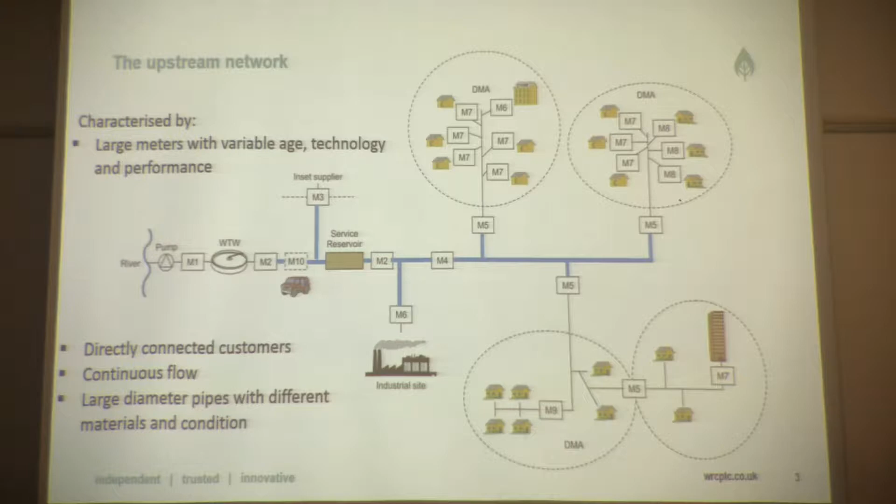They have some directly connected customers. They might be large logged customers, but you might also have a few households just connected to a trunk main because that was the only pipe around, or it could be a legacy issue. They effectively have continuous flow coming through them. So unlike your DMAs where you'd hope that flows drop down, it would still be continuous, but they drop right down during the night. Actually, trunk mains often have flow all the time because they might be doing things like filling service reservoirs, etc. So the flow isn't so connected to our kind of daily patterns of use.

And I've already said, yeah, large diameter pipes with different materials, different conditions. I'd say asset records on some of these big pipes are no better than the asset records on many of the other pipes we have.

So we have to think about them a little bit differently to DMAs when we want to work out what's going on. And one of the reasons why people are slightly sceptical about the approach that I quite love, which is doing balances across them, is because of the meters. So I'm going to talk about that in a little bit more detail. But fundamentally, I believe if you can't measure it, you can't manage it. It's a very old saying that we've used time and time again.

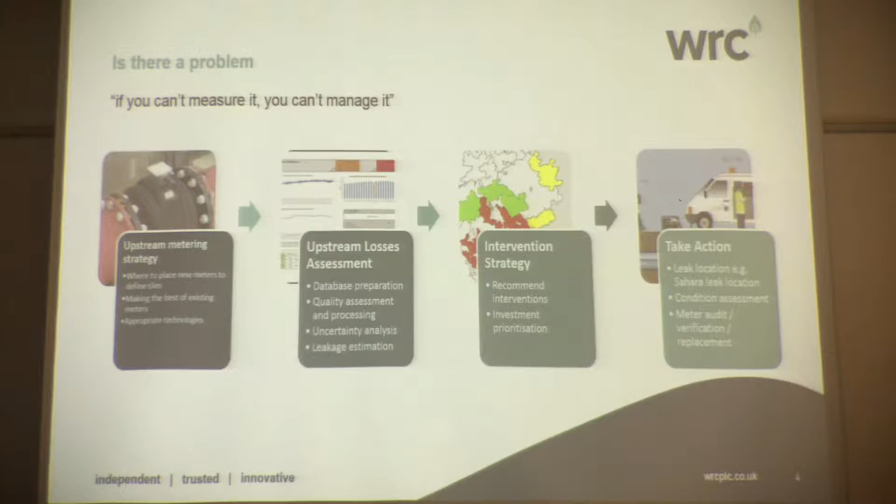And I think it comes back to that water balance question of what is this unaccounted for water? And I personally believe if we can get the water in the right buckets and we know where it's going, then we can start to manage it. And if we don't know if a leak is in a DMA or in the trunk main network, how do we know where to send resource or how to manage out the problem from occurring? So I think we have to focus on quantifying, understanding the upstream leakage to make sure that we're spending the right amount of resource in the DMAs and in them.

So to measure upstream leakage, you're going to need meters, big meters on these big pipes. So you need to have a good strategy to make sure that those meters are sized correctly, are put in the best locations to be able to break the upstream network down. And also to make use of existing meters and understand those meters. Do you actually know which asset is out there? Do you know what type of meter it is, when it was installed?

Have you matched the serial number to the age that you think it is and actually checked that that makes sense? So asset records of large meters.

DI meters, everyone knows about. They have to be verified, that people know where they are, what they are. They might not be very good, but they know what they are. DMA meters sometimes have been fit and forgotten. Interstitial meters, that's a fancy word for ones in the middle of a network that aren't necessarily serving a real purpose, often don't have a clue. You might know there's a meter in the ground, but no one really knows what it was or where it came from. So making sure the asset records are there is quite important as well.

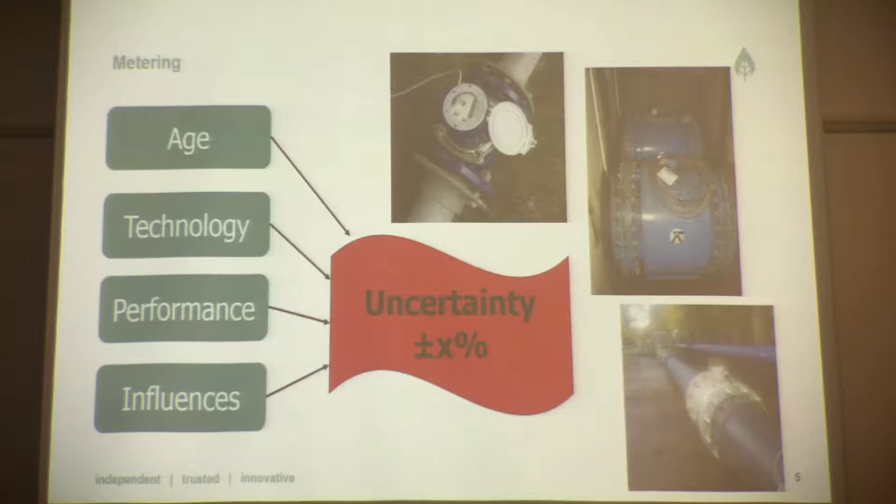So for anyone who's not familiar with metering, effectively you can't trust the number that the meter says on it. You have to make sure that you understand how accurate that number is before you use it.

Meter uncertainty is influenced by lots of different factors, including and not limited to age of meter, the actual technology being used - whether it's electromagnetic, ultrasonic or a turbine meter - performance issues, so has it been stressed through its life or has it just had one continuous flow going through it, and other influences. Is it installed appropriately? Has it got 90-degree bends immediately upstream or downstream of it? Is there lots of sediment in the water going through it causing additional wear? All sorts of other influences.

But we can take that information and meter test records to actually estimate the systematic error from a meter, otherwise known as under and over registration. And then we can use the sample of all those meters that have been tested to actually estimate a confidence band around that error estimate. So you can end up working out how to adjust your flows to get the most accurate idea of the real amount of water passing through the meter, and also understand how sure you are about that number.

The pictures on the slide, I should just say, are of some big meters and also of a large meter test rig, a flow loop that can be used to test them.

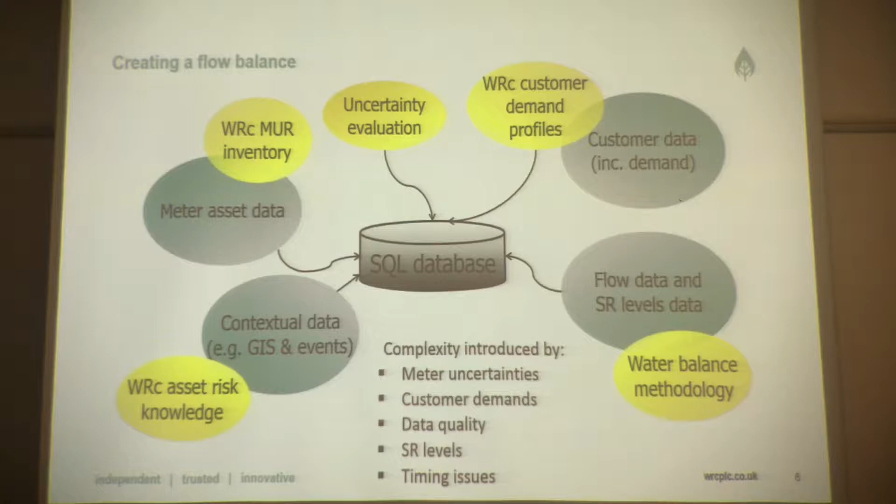So I said at the start, it's not a DMA, so we're not only interested in the night use period, because fundamentally, if the flows are lowest through some of the meters at night, that's when they're likely to be most uncertain. So we can actually get a lot of valuable information from looking at the daytime period when flows are higher.

We can actually look at the diurnal profile that results from the balances, so the average of all the midnight points, all the 15-minute pass points, etc., to inform whether or not we might have got our uncertainty estimates correct, our meter under-registration estimates correct, or whether there might be customers directly connected to the trunk main that the company isn't aware of. A housing estate that actually got connected to the trunk main and they thought was connected to the neighbouring DMA. And this does happen. This is not me making up insights.

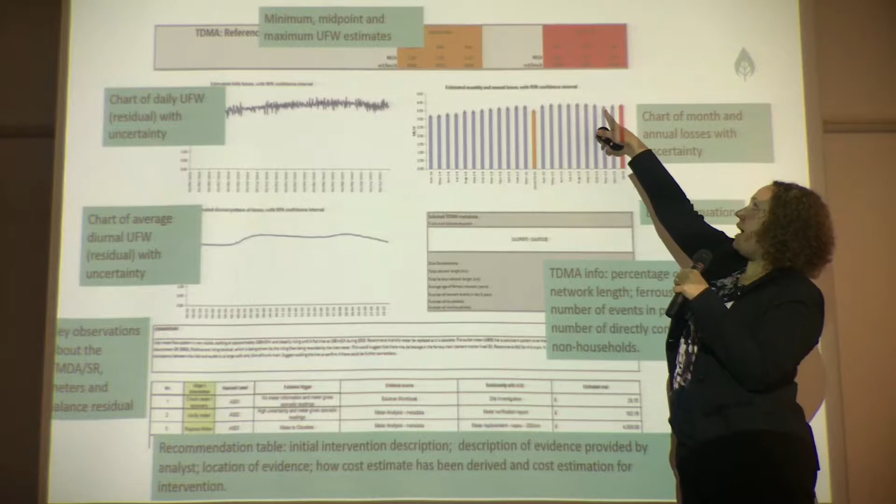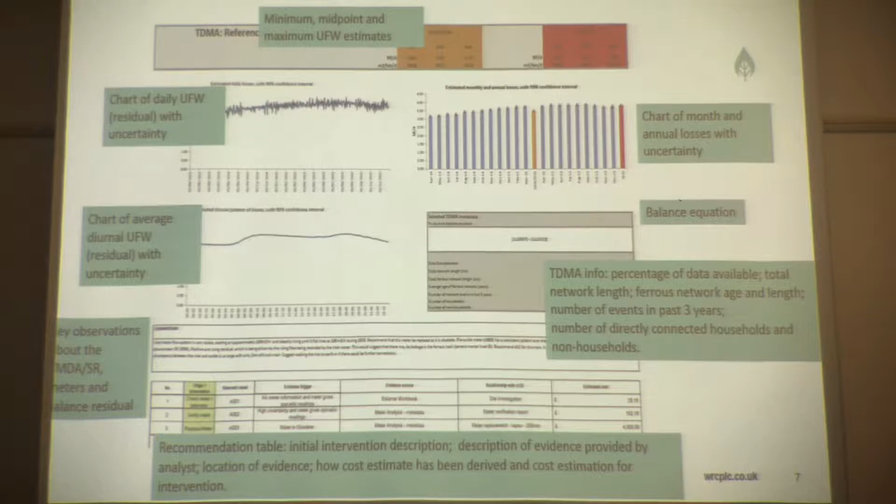So when you do this, it's quite a simple one, but you basically get your losses estimate for the area and you get an uncertainty band around it. If that uncertainty band is sitting above the zero point comfortably, and there's no major metering issue like one of the meters not working, then you've probably got some sort of losses in the area, and that might be a loss going to a customer you don't know about, or it could be a leak. And that's the importance of the uncertainty band.

If your uncertainty band is crossing zero, then actually you might just want to get a better grip on understanding your meters to work out whether or not it's worth spending any further time there. And I think the clever bit is that this is more engineering than data science. There's a lot of data number crunching that goes into pulling everything together, but actually it's engineering insight that's used to say, well, what could actually be happening and causing this diurnal profile, or for this period of time a funny thing to occur, or if we think there is a loss in this area, which pipes in particular might be the first port of call for looking for a problem. Is the cathodic protection working on that major steel pipeline? Who knows? The water company probably doesn't know.

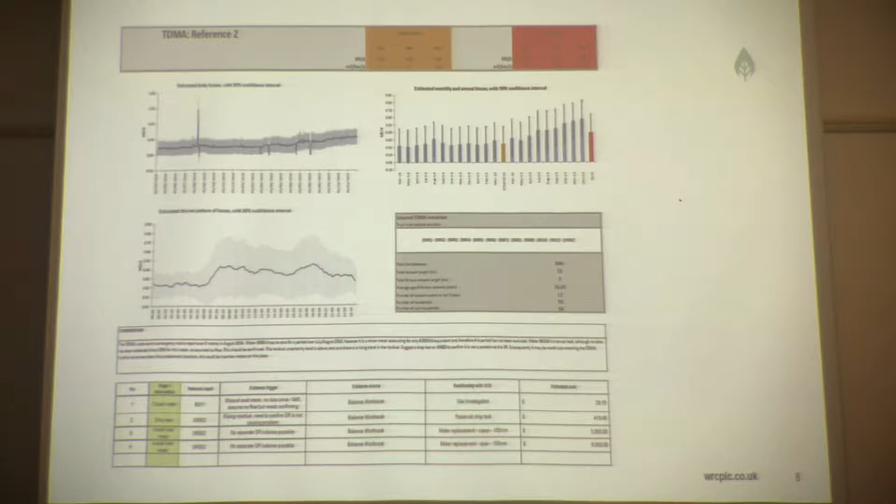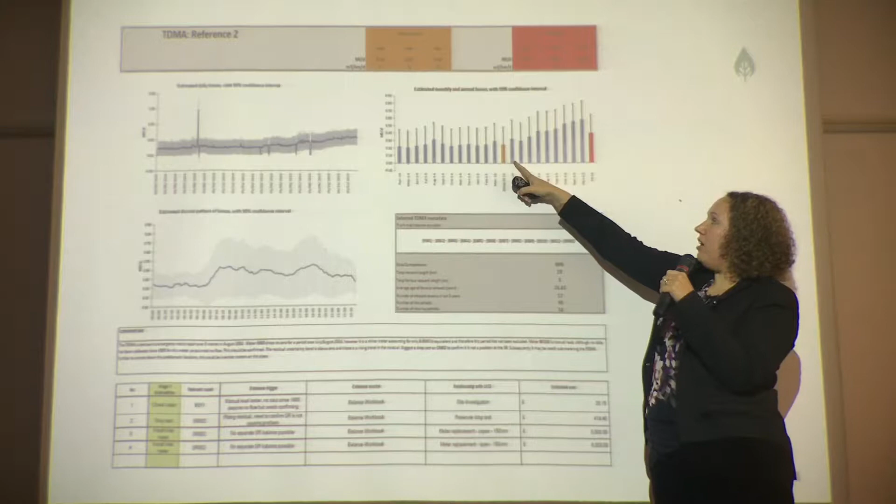Second example here then of another upstream DMA, as I call them, or tiles you might hear them as, or TMAs, or upstream area—lots of different words are used. So this is just an example of a much wider uncertainty band, but you can actually see there's a rising pattern. So even if the real losses were sitting at the bottom of the uncertainty line, it's rising, and so it's a growing problem. So you might want to prioritise this area to try and find out, is that a metering issue, or is it a growing leak in the area?

As I said before, in terms of making those intervention decisions, where that uncertainty bar sits matters. In the top example, which is just some monthly estimated losses, there are two very large meters in this area, 300 millimetres, and actually our recommendation is to verify those, to try and reduce the size of that big uncertainty bar, so that you can work out whether the genuine result is sitting above that zero line, because otherwise you might be chasing a leak that doesn't exist. In the second example, the bar is sitting above zero and it's growing. And in this case, we'd say, well, we think there's a problem or something going on in the network that's worth going and spending some time investigating.

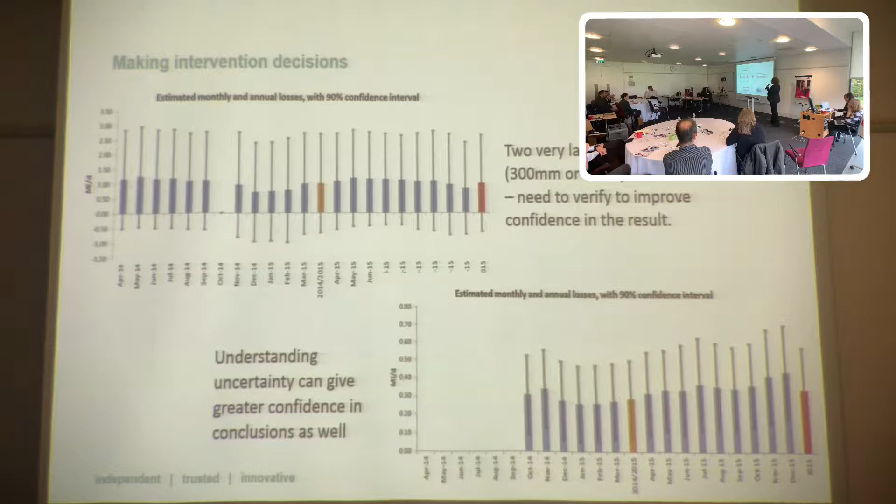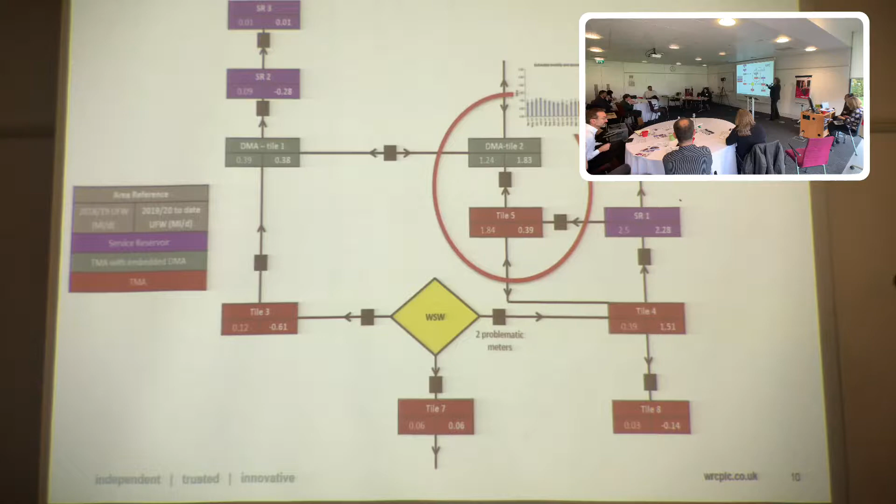I just wanted to highlight this example from another area. It's just an extract of an upstream area summarised, really. We've got 2018-19 losses in the left-hand number box, and 2019-20 to date in the right-hand boxes. Now, this company had previously not done any balance work across their upstream network, but they obviously have DMA-level leakage estimates, etc. And we happened to include doing two DMA tiles in this because they had quite a significant amount of upstream network that couldn't be separated. So one of the DMA tiles looks a bit messier than you'd expect from an upstream one, but there are hundreds of customers.

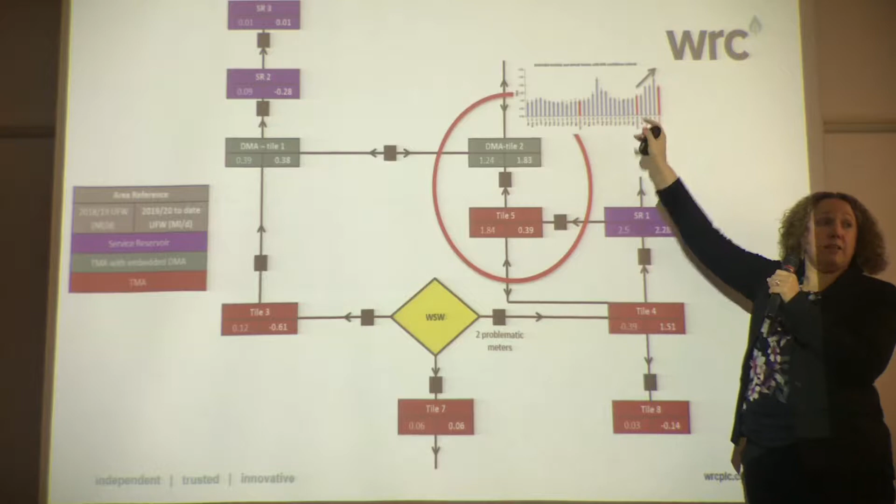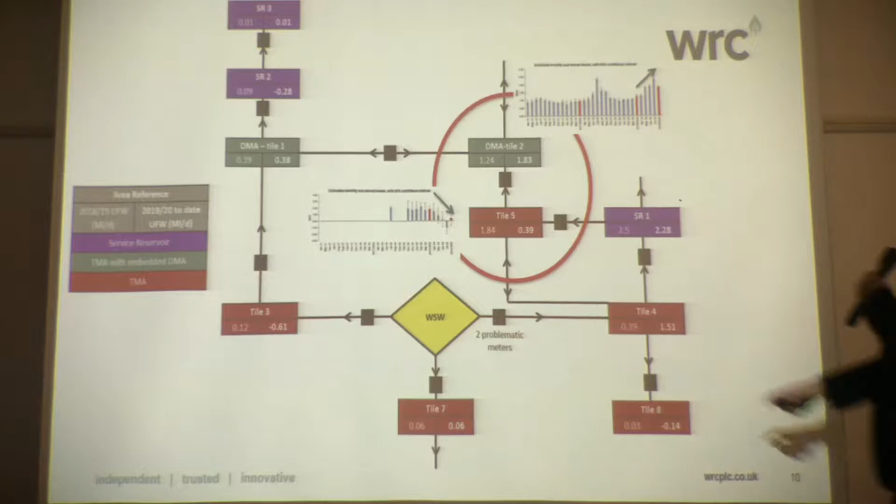We've got 2018's water use—unsurprisingly, a big spike. It was hot, it was dry, everyone had their paddling pools out. It came back down during the winter, and then they saw a similar pattern in 2019, though 2019 was not as warm and beautifully sunny. So this company had been sending out resource to this DMA to look for leakage ever since they spotted this rising pattern, with no knowledge of what was going on in the upstream network. So we came along and produced an upstream balance for it. And unsurprisingly, in 2019, we saw a massive downward trend, so it's dropping down to the negative.

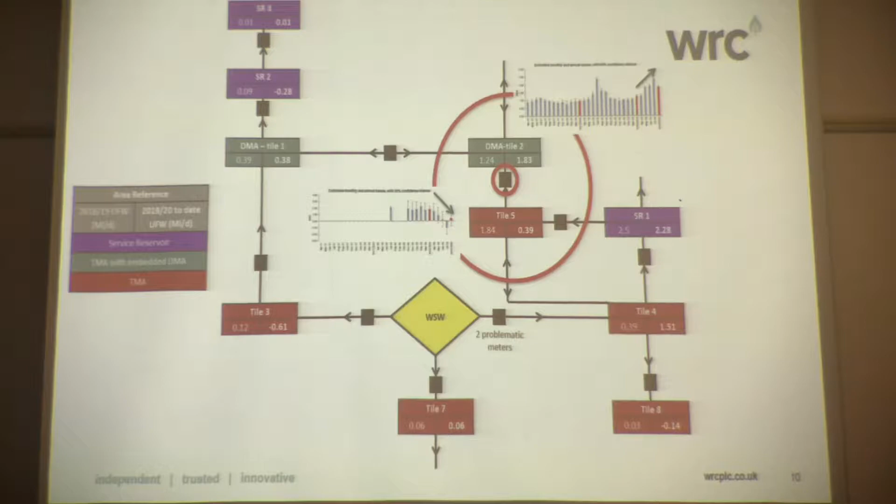That piece of insight led us to say we're suspicious of this meter, we think it's not recording correctly. And sure enough, the water company went out, looked at the meter, and it turned out it was drifting, the performance was changing. I don't know the cause of that, but they've now rectified the situation, bringing down their DMA leakage, causing much cheering amongst them because it was quite a significant volume. Now they can accurately work out what that DMA leakage is. But they'd spent 4 months chasing mythical leaks in a DMA, crews out sweeping, looking for leaks, because they hadn't got that other side of the meter issue.

This is why I think upstream stuff is so important, because what's the point of chasing leaks in DMAs if there's actually problems either at the meters or upstream? You wouldn't know just by looking at the DMA flow.

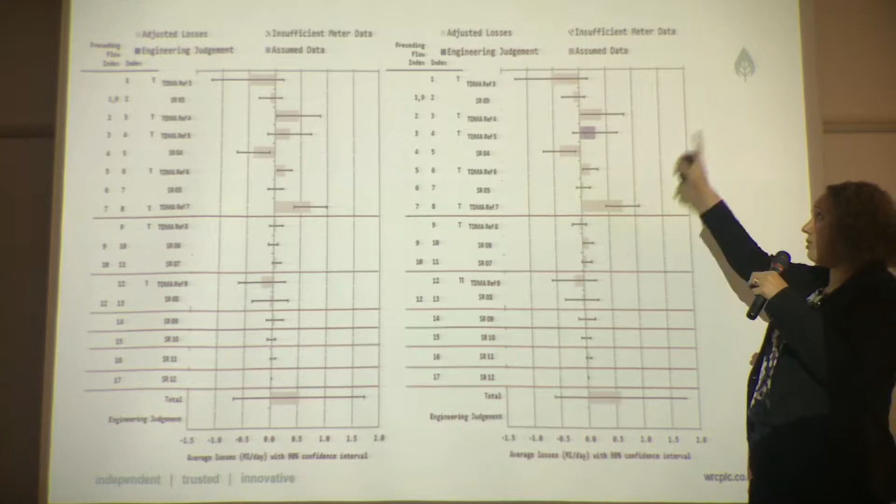My final bit before I hand over to Ant, who talks more about doing practical surveys, is that you can combine all of these smaller areas together. You then remove uncertainty, because if you get more meters that become internal, you can ignore the performance of that particular meter and end up with a larger area zone. You can also often see compensatory effects. For instance, this TDMA has a positive, but this service reservoir has a negative. Probably it's the meter or uncertainty there that's causing the issue, so they cancel each other out. If you put them in the right order, you can see which of them cancel out and which of them actually might genuinely have a leakage problem, to get your total at the end.

This is the segue really to Ant. This is a final example from another water company where we'd done a tile balance and thought there was about 2 megalitres a day of leakage in an area. The company in this case was Welsh Water, who went out and confirmed that the meter flows were correct, the data we were using was correct, and subsequently asked our infrastructure team to go and survey the area to try and find the source of this potential leakage. Inspection by our team identified the location, Welsh Water repaired it, and as you can see, this is a before and after, red and green. They reduced by almost 2 mLD, and importantly, that uncertainty bar is now crossing zero, so the remaining bit could just be a result of the meter accuracy. That's my segue to Ant and his inspection stuff.

Oh yes, sorry, yeah. Sure, we got that one.

Thank you, Carmen. Good morning, everybody. You've heard Carmen talking about the metering side, identifying where potential losses may be. I'm going to talk more about the practical side of things, where we've actually been out doing surveys and what we actually find in practice.

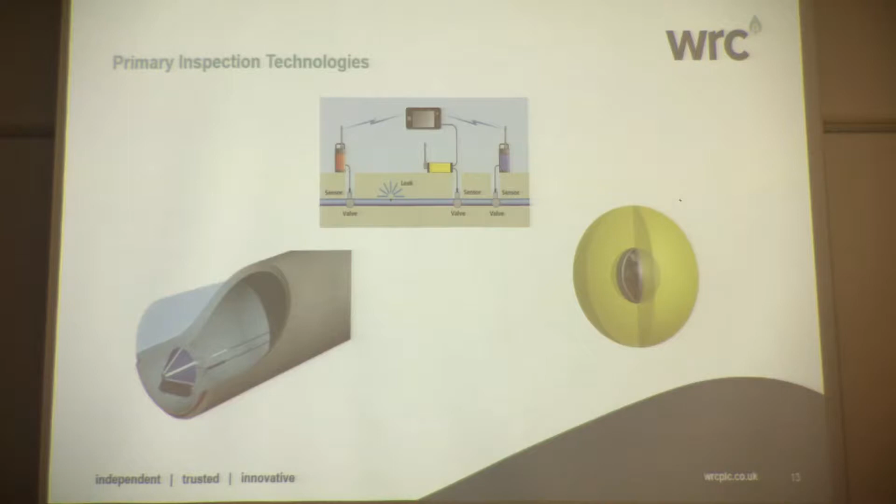There are really 3 technologies I think are probably the most applicable to detecting and locating leaks in trunk mains. The correlator, which we heard about from Joe earlier, was developed - I think actually in the 70s - by WRC, who were working on it. Malc can probably back me up on this, possibly just with knowledge rather than actually being there at the time. But the correlator has traditionally been used on small diameter networks, very good on metallic and smaller pipes, and has in the past struggled on large diameter pipes just because of the physics of the way the sound travels.

Just for those who don't know how they work, basically you have a leak between the sensors attached to the pipe. The sound travels along the pipe and you pick it up at remote locations, and by measuring the time delay in the sound arriving at the two locations, you can calculate the location of the leak between those two points. But it relies on the sound travelling down the pipe, and in larger pipes the sound is attenuated quite quickly as you move away from the leak, so it can be hard to hear smaller leaks. In non-metallic pipes or plastics, the sound is dissipated more quickly as well.

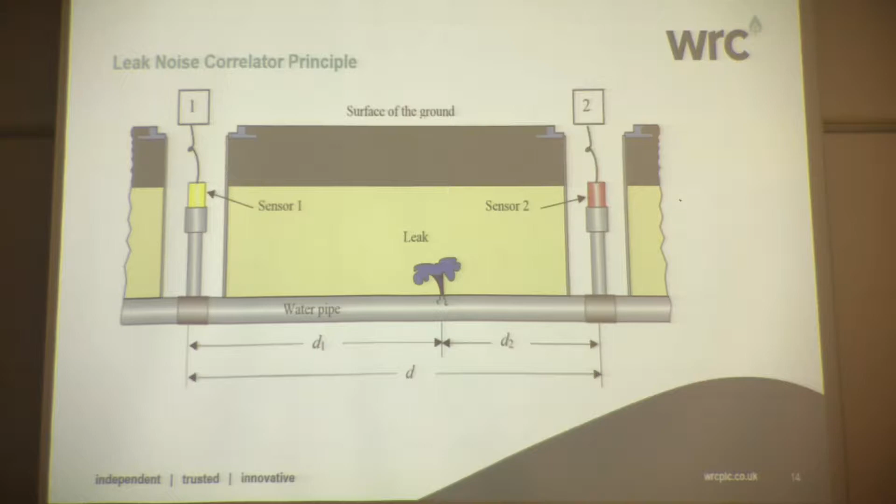Improvements in correlator technology mean it's now becoming more widely used on trunk mains, more successful at finding leaks over longer distances and slightly smaller sizes. So it is a technique, but the thing to be wary of is that if you start looking at very long lengths, you might get a result which says 'I can't find any leaks' - but that might be because it can't hear the leaks, not because there are none there. So it's worth bearing these factors in mind when looking at different techniques you might apply.

The Sahara system was actually developed again by WRC. The correlator's initial research was done at WRC, I think, in the 70s. Sahara we looked at in the early 90s, and started developing it then, as a direct result of awareness of the limitations of correlation in big pipes. We decided that if you could put a sensor in the pipe and have it travel along, you would go past any leaks that were there and be able to detect them.

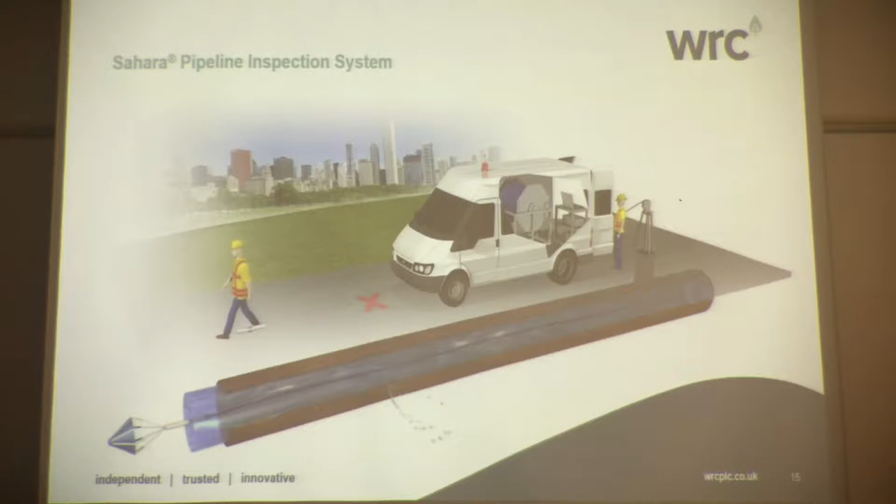We've coupled that with a locating device so that now if you detect the leak with the sensor, the operator at the vehicle is able to stop the cable, position the sensor at the leak, and use the locating device to pinpoint it - if it's sitting directly over the leak, they can mark the ground and identify exactly where that leak is. This is something we've actually been using for over 20 years now, particularly with Thames Water, and I'll come on to some results from that system shortly.

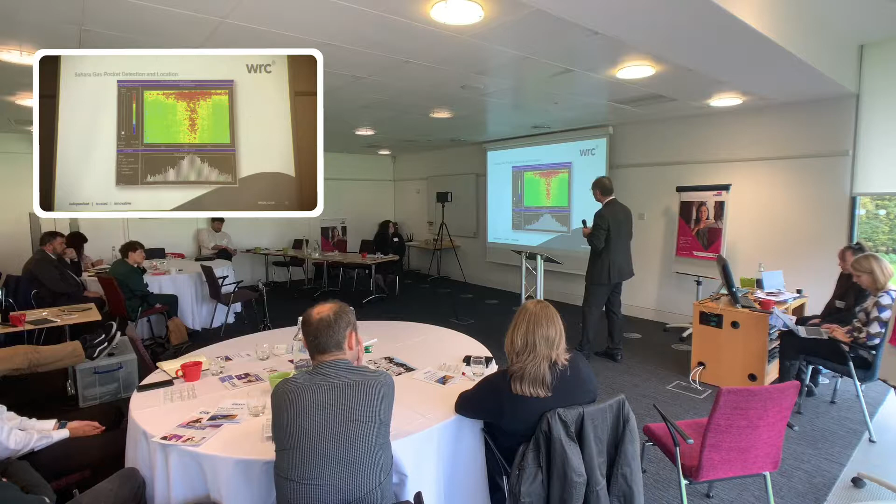The operator gets a number of different displays, but primarily what we're looking at is the sound signature. As you move along the pipe, from left to right, we see a peak in the absolute level, but also a change in the leak noise characteristics - higher frequencies occurring, represented by the bottom edge of the graph, and the low frequencies also building up. That data helps us pinpoint precisely when the sensor is sitting at the leak.

We've also developed the sensors for Sahara, and we have a sensor which can be used on plastic pipe. Although we can use the acoustic method perfectly well, we find that you can also use an electrical conductivity method to find leaks in plastic pipes, and that will also pick up metallic fittings, so it can tell you whether your leak is at an air valve or at a previous repair potentially. So it's additional information that you might get from carrying out that survey.

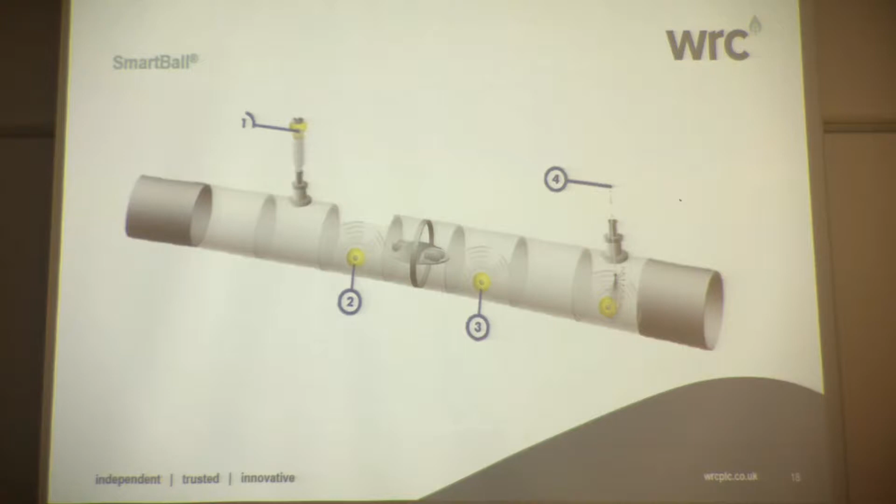I'm going to skip past that SmartBall one, it's an animation of the technique. If anybody's really keen, I can talk to them about that later. What I really wanted to get to, though, was the sort of results.

So, what is the problem with trunk mains leakage? Well, with Sahara, over the last 20 years, we've surveyed 2,875 kilometres of cast iron pipe. That includes resurveys, and our biggest customer, Thames, we actually sweep round their network once a year and are repeating surveys. But in that period, we found 3,400 leaks.

If you just look at what the average distance between leaks is, that's 842 metres. Bearing in mind that we've been through the network, they've repaired them, but they don't repair all of them, they will leave the very small leaks which are probably not economic to repair and monitor them. But what we're seeing is leakage occurring at around every 840 metres, we're finding a leak.

And the average size of those leaks, because we're able to give an indication of size, is around 0.15 MLD, or about between 5 and 6 cubic metres an hour. So I think you'd agree there appears to be a problem there.

If we look at cast iron, so just the first survey at each site, clearly the figures are likely to be worse because these are probably pipes that haven't been looked at. Well, they've probably been in the ground up to 158 or 180 years, some of them. So the first time we've surveyed, the first survey total is about 546 kilometres.

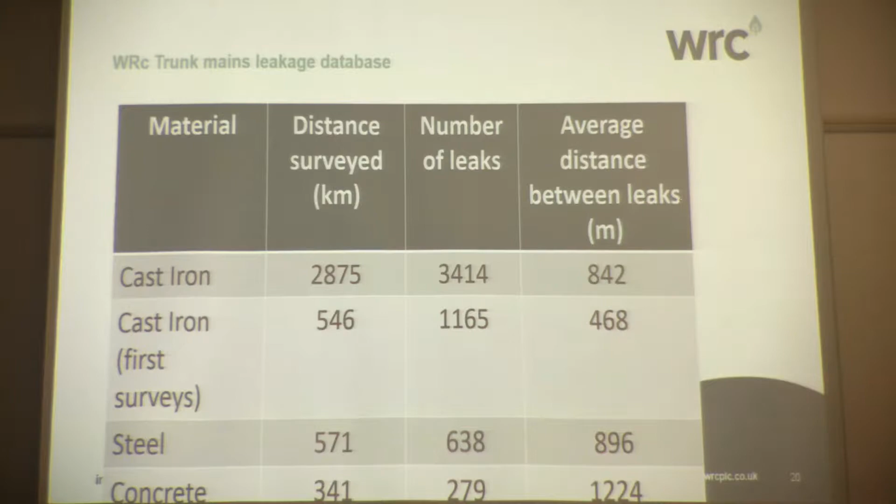No, I'm not sure that's necessary. What you'll notice is there's no ductile iron showing. I think it may have been on the bottom, but clearly ductile iron would show up as well. It actually shows up quite poorly because the ductile iron inspections we've done have been specifically to go and find a leak that's known about on a pressure test of a new pipeline very often, rather than just random leakage detection. So ductile iron would look poor in this data, but actually its performance generally would be better.

The cast iron data is virtually a random sample, but it is heavily biased towards work in London. I freely admit that. But where we have got data from other areas around the world, it's been shown to be similar. The concrete data actually includes a lot of resurveys where there have been repairs done in the meantime, so it is a slightly skewed number.

I think it is quite skewed, actually. I think if I'd gone through and done the first surveys for the concrete, it would look worse than it does. So I wouldn't read too much into the lower numbers. What I'm saying is we've got a lot of cast iron in the network.

But not going too much into that detail - we have 6 plants in Europe, 3 for each technology, so a high capacity. We are generally supplying pipe for all kinds of installations.

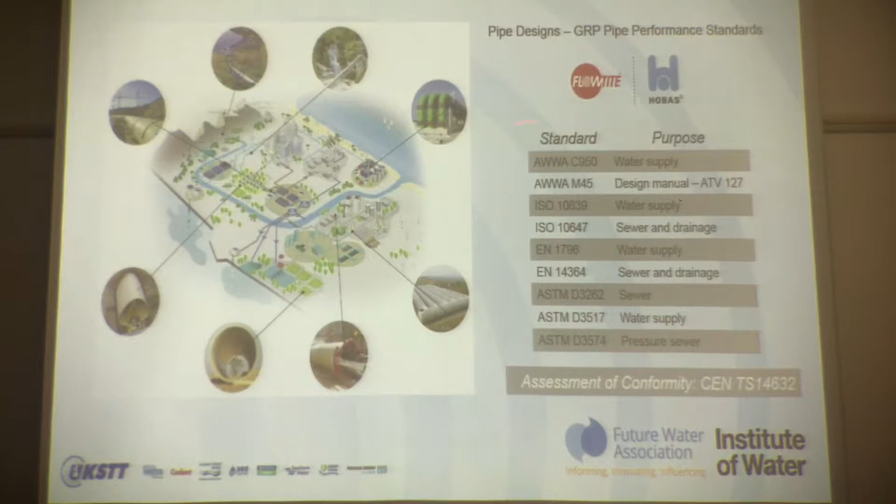We are today going to discuss different kinds of slip lining for pressure lines, sewer lines, stormwater lines, etc. But our main markets are also in water, sewage, industry, hydropower. We're also doing a lot of jacking, and all within the European standards for GRP pipes, following also by all the American and ISO standards.

These days, environment is in focus, and with all respect, GRP is among the best products. A lot of analysis has been done showing that we have a very good material in that respect - this also has to be taken into consideration. One of the big advantages, of course, is also that we have a non-corrosive material with a very long service life.

Just to show you, before we go more into the renovation and relining, this is the product range from 200 millimeter up to 4 meter in diameter. Pressure pipes up to 32 bar. Standard length 6 and 12 meter. Particularly for slip lining, it can be also from 1 meter and whatever length is suitable for the job to be done.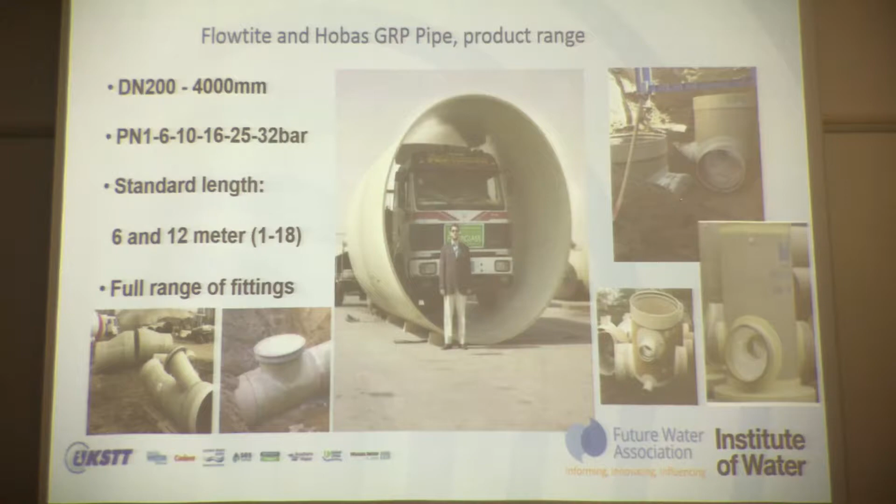And of course, a full range of fittings can be tailor-made, like also manholes, etc., whatever you need on the pipeline.

What we are talking about is a typical composite. It's not a homogeneous material - it's a composite of polyester, glass fiber as the reinforcement, and some filler. Depending on the Flowtite or Hobas production process, we have quite similar ways of building up the pipe, with the structural skin on both sides and the core in the middle.

The standard products will be with standardized pressure classes and stiffness classes. In special occasions, if there is very high abrasion or special chemical requirements, we can also do special liners to have a pipe which can stay for longer than a standard pipe. But normally in municipal work, a standard pipe is very suitable.

Slip lining with GRP pipes. There is a lot of control and evaluation that you need to do before you go ahead with slip lining in general, or with renovation, of course.

The corrosion on the existing pipe, damages, if there are some breakdowns inside the pipeline, if there are curves that you even don't know about before you're inspecting the pipeline inside, the diameter and which diameter can be possible with a new pipe, possible pipe length - both from entrance possibilities and the curves in the line - structural strength needed.

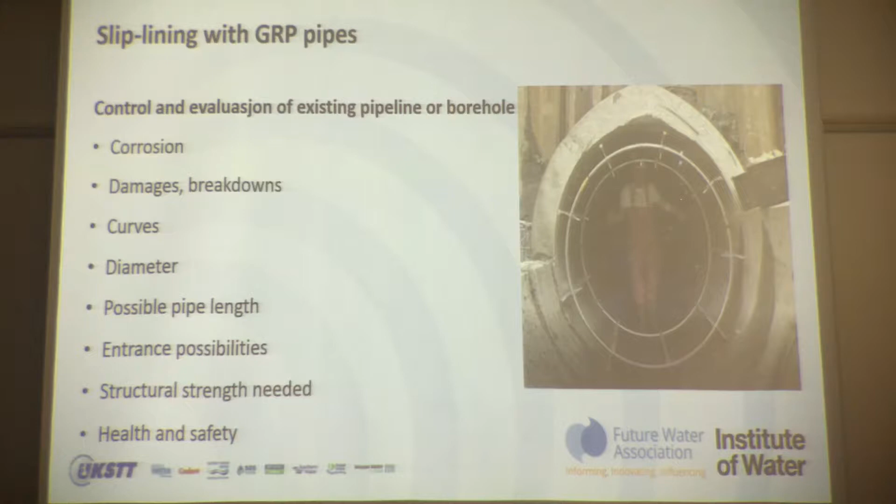Sometimes you have corrosion on the old pipe, but the pipe is still strong enough for years when you do the repair work. But in some cases you also need a full structural solution with the slip lining pipe. And of course, you have to evaluate the health and safety, especially when you're having people working inside the pipeline on the big diameters - that's a critical point in many cases.

Some of the advantages: it's a corrosion-free material, which will last for a long time. We are today quite sure that if our pipes are installed the correct way, they will last for at least 150 years. And when we see all the problems with traditional materials, we see more and more waterworks and utilities requiring 100, but also starting to discuss 150 years.

It's a low-weight material, so it's suitable for transport into existing pipelines, depending on how you do it. And optional length, as I said, we can produce whatever length is wanted. Limited wall thickness, so that we are not reducing the capacity of the existing pipeline too much, but still having high strength.

And we have various joint possibilities. You can have traditional couplings. We can have a lock joint biaxial solution with axial strength. And we can do lamination work so that you get the same material in the joint, so to say, as in the pipe.

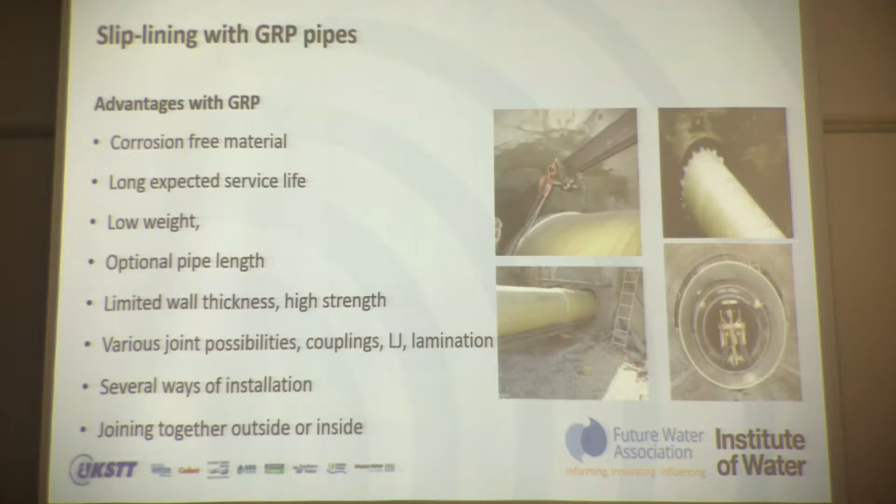Several ways of installation, to transport the pipe inside the pipe or borehole, joining together outside or inside. It's pretty much also depending on the diameter we are working on. On the bigger ones, in many cases, the jointing is inside the existing pipeline. For the smaller diameters, normally we do the jointing outside and push or pull the pipe into the existing one.

You see some pictures here, a borehole in the mountain that was sliplined. Getting back to the project, there are steel bars as a track to push it in. We have special trolleys that have been used to transport the bigger sizes of pipe, with spacers, just pushing them in. And in some cases, even with a crane beam at the top of the old pipe or in the borehole.

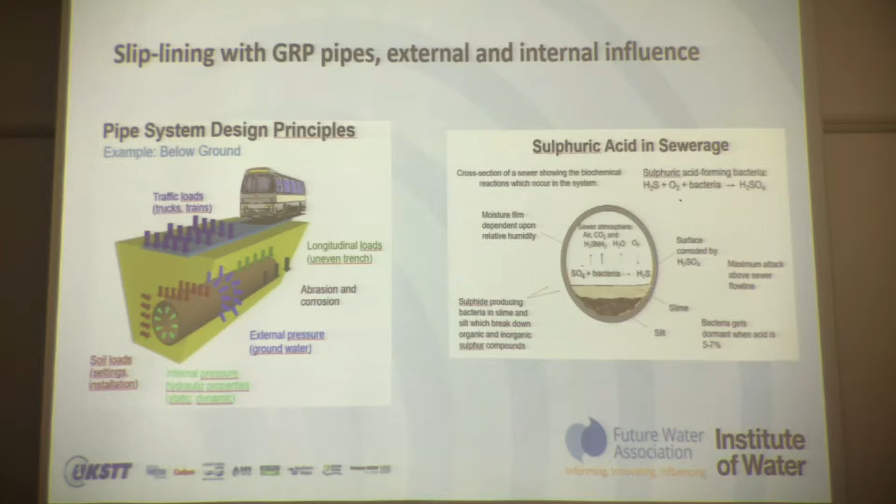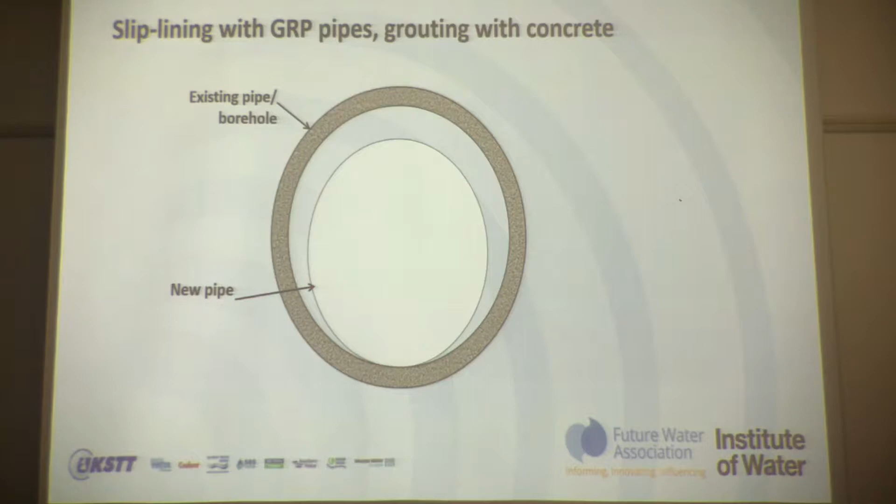When we do the slip lining, one of the advantages with GRP and this kind of work is also with bypass pumping. In some cases, it's difficult to get it completely dry, and with other methods that might be a requirement. With slip lining, it's not that big an issue, and we have even had jobs ongoing where we got heavy rain, and on combined storm sewers we got flooding into the pipeline. Generally, it's more or less just a matter of flushing and cleaning and continuing the work, which would be impossible with cured-in-place and some other alternatives.

When we have the existing pipe or borehole, whatever, and a new pipe inside, there is grouting in between the two pipes. Of course it can be more in the center, depending on how it's installed. But sometimes you have the possibility of drilling into the pipe from outside, filling up the gap in between.

In some cases, we are pulling the injection pipe together with the pipe through the old one. In one project, which I will show later, we used 80 millimeter polyethylene pipes at different distances, and we were just filling them up when doing the grouting. In other cases, we supply the pipe with nozzles so that you can also do the grouting from the inside.

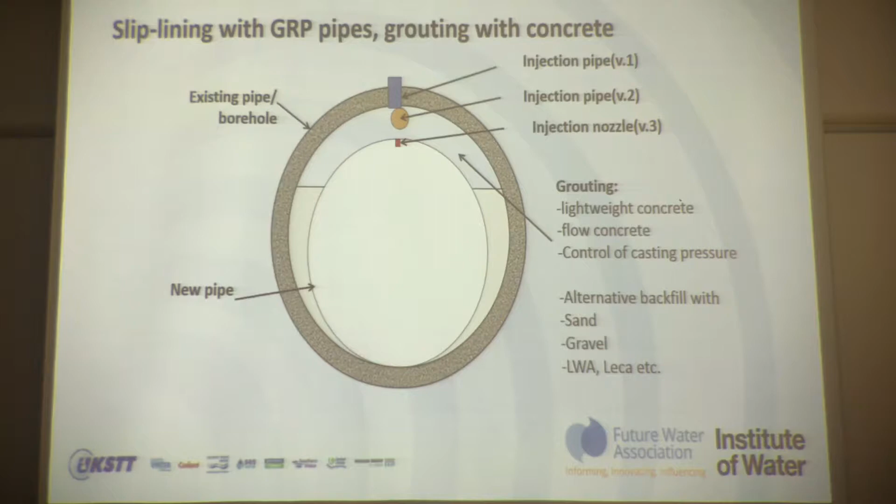Alternatively, you can also fill up the new pipe with water. If you have a steep slope, this also compensates the inside-outside pressure difference. Alternatively, backfill has also been used with sand, gravel, and lightweight aggregate like LECA, which are blown into the gap between the two pipes.

The problem is getting a 100% filled gap — if you have settlement or a crack on the old pipeline, you can get punctual loads on the new pipe, and you can also get settlement in the ground. But of course, the advantage with gravel, sand, and LWA is the possibility of taking the pipe out again, which is much more difficult when you have grouted it in concrete.

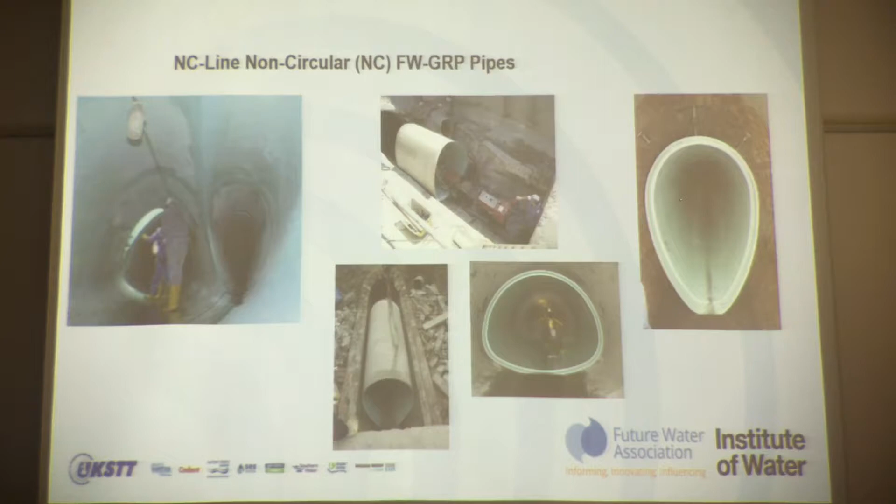In addition to round pipes, we also have a big production of non-circular pipes, which are also used in many cases for slip lining. Let me show you a few samples.

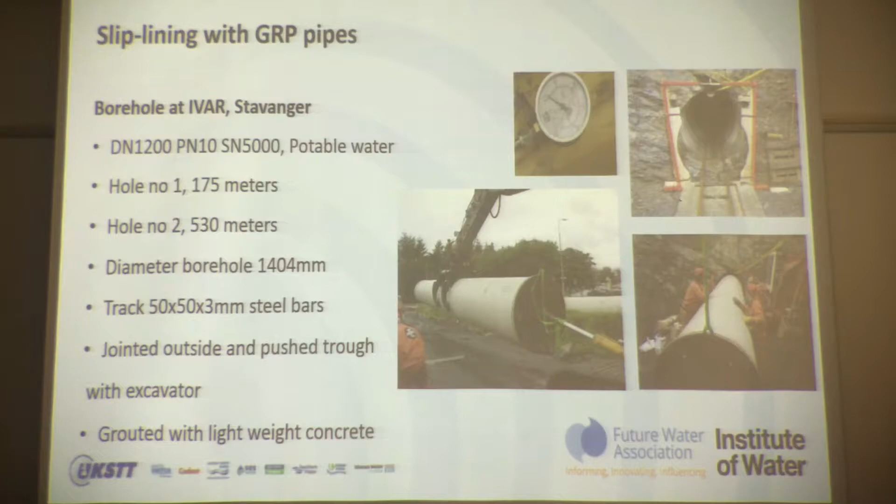In Stavanger on the west coast of Norway, this is a potable water line installed in a borehole in rock, which behaves similarly to an old pipe in many cases. It's a 1200 millimeter PN10 potable water line, with two boreholes, one 175 meters and one 530 meters. They drilled a hole of 1404 millimeters.

Then they built a track through the borehole using 50x50x3 millimeter steel bars. The pipe was jointed outside on the track and pushed in by an excavator.

There was a buffer, just a cylinder, to take care of things if something happened, and they monitored the pressure on this cylinder. If friction increased or the process stopped, they had 1 meter to collapse the cylinder, because there was a safety valve to prevent the excavator from putting too much force on the system.

We tested pushing two pipes against each other inside the coupling before this job, with a 1 degree angular deviation inside the coupling. The measurement stopped due to technical issues with the equipment, but we had reached 85 tons without any damage to the spigot of the pipes.

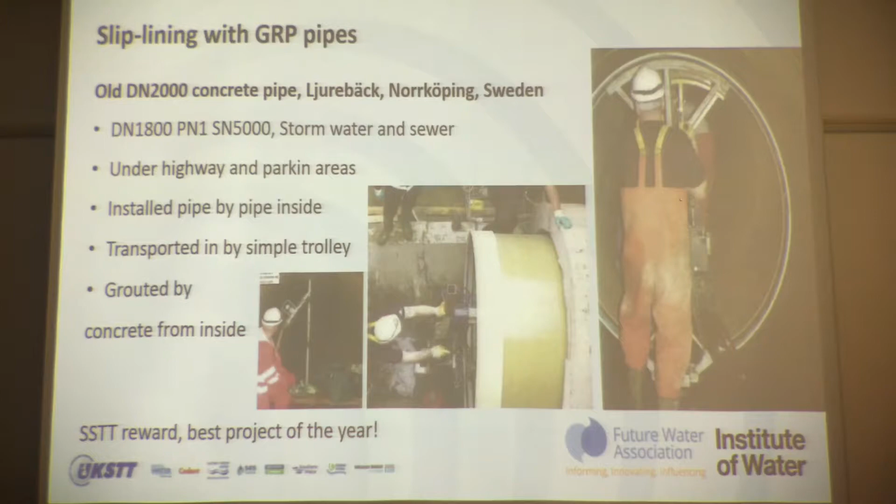The installation was under a highway and a parking area, totaling about 444 meters. The access point was at an elbow in the middle, so they did the slip lining in two directions, and then put the elbow in place last, before the grouting.

Here you also see they had a simple trolley at both ends of the pipe, manually pushing the pipe through and connecting them inside the pipeline. The grouting was done through nozzles we supplied on the pipe, with concrete pumped in from inside the pipeline.

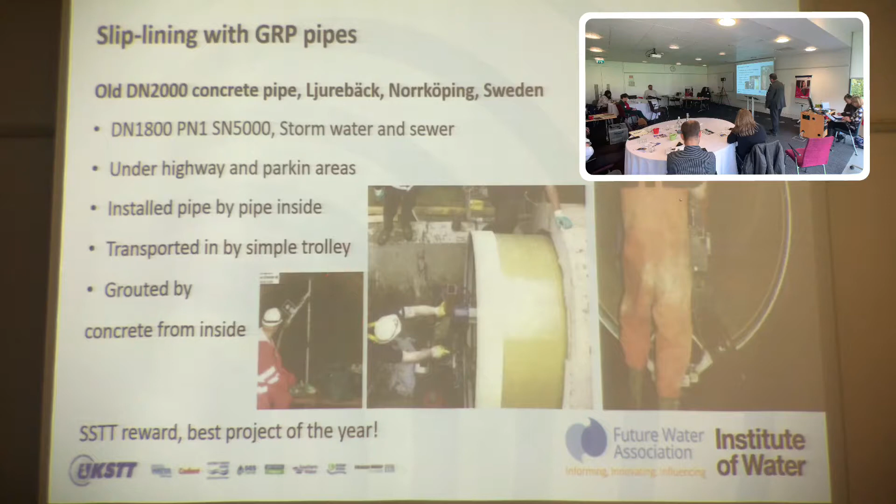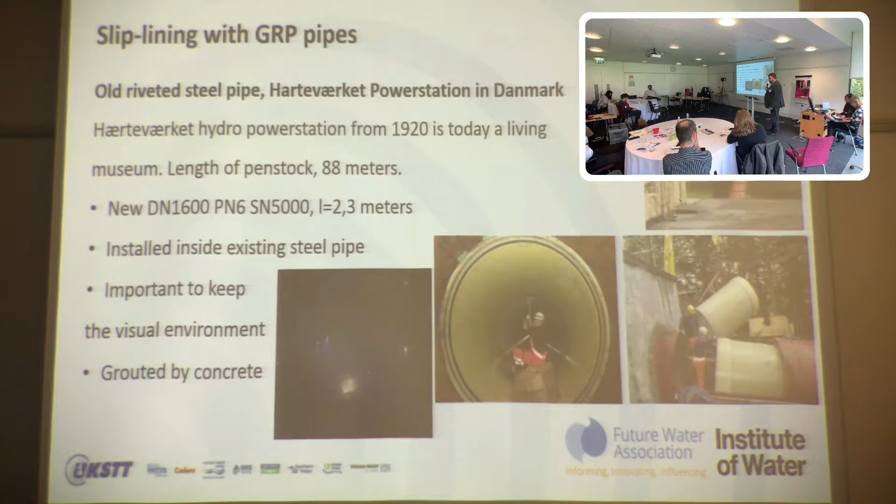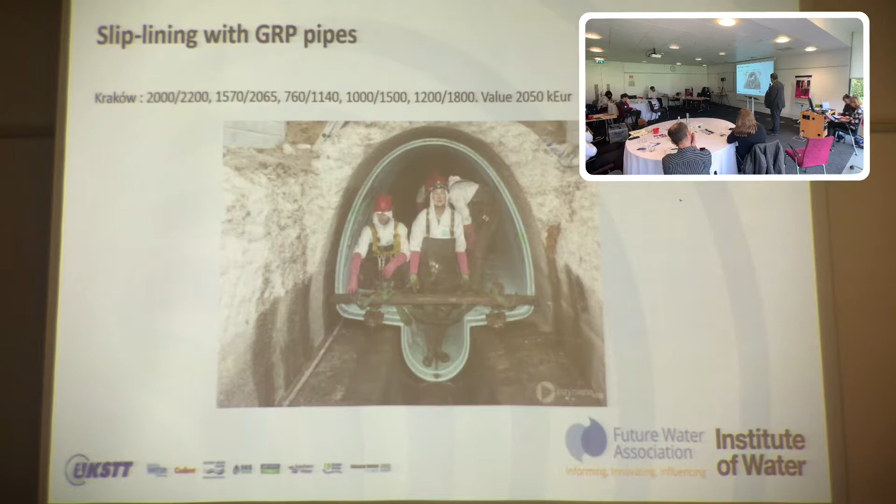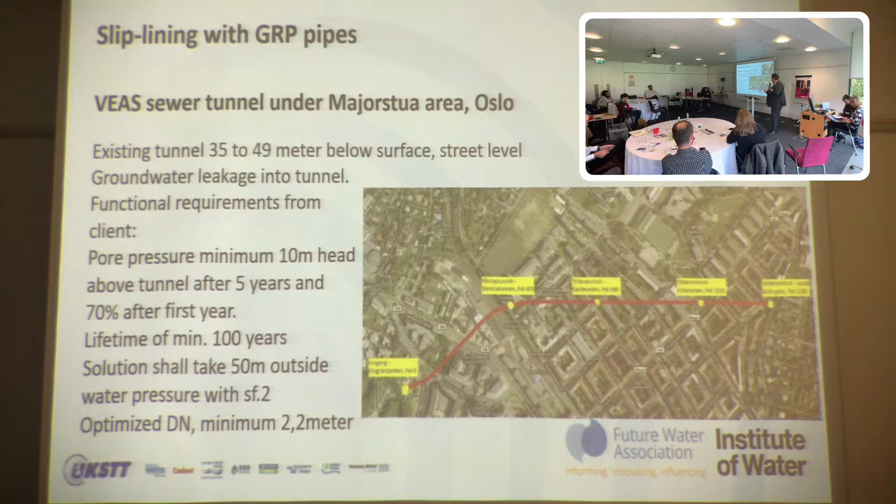...together with Skanska, sitting down and doing a lot of preparation during the tender phase, preparing everything - the logistics and how to do it. It was one access point, and it should be a length of 1150 meters into the old tunnel.

After having a 'tolk', as we say in Norwegian, a dummy to go through and see which length of pipe was possible in the curves and which diameter could pass, they ended up with 2.3 meter diameter and lengths of 4 and 2 meters. The reason for the two lengths is that in some of the curves we took advantage of the angular deflection in the coupling and made the curves without having to produce any bends inside the old tunnel.

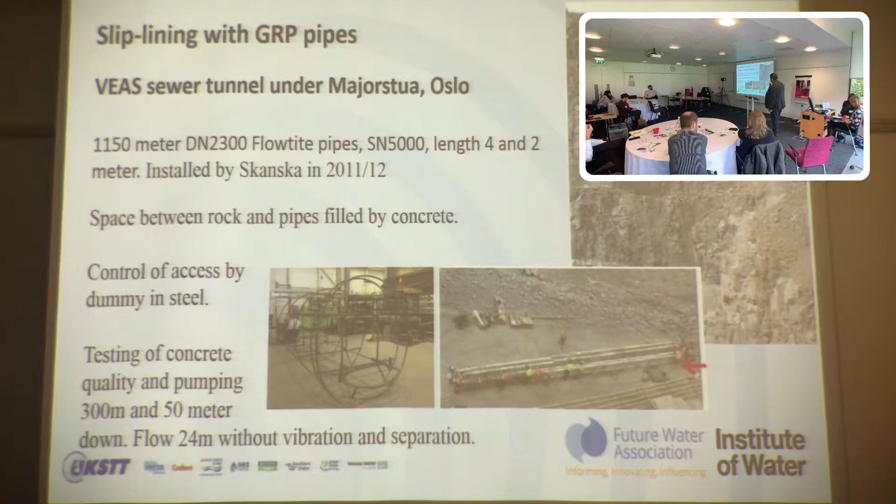Of course, when you're pumping concrete, it's easy to have separation of the concrete. So Skanska and the concrete supplier did a lot of actual testing - they had a full test area of dropping the concrete 50 meters down under the surface and pumping it like 300 meters before it should be grouting between the new pipe and the tunnel. So they found a good recipe for the concrete that works fine, and then they could pump it - it should also flow 24 meters in the grouting area, because the sections for each grouting were 24 meters of installation.

Here we see a number of pictures - a very special trolley with its own engine and hydraulics. It was driving into the pipe, lifting the pipe, and driving into the tunnel. When you are putting 4 meter and 2 meter pipes at a time, and starting almost 1200 meters in, the logistics are of course very critical for the installation and the schedule.

And then you see in some areas, because it was also a very strong requirement that there should not be any water going in between the rock and the pipe, there was injection both between the pipe and the concrete and the rock with epoxy after the grouting was done.

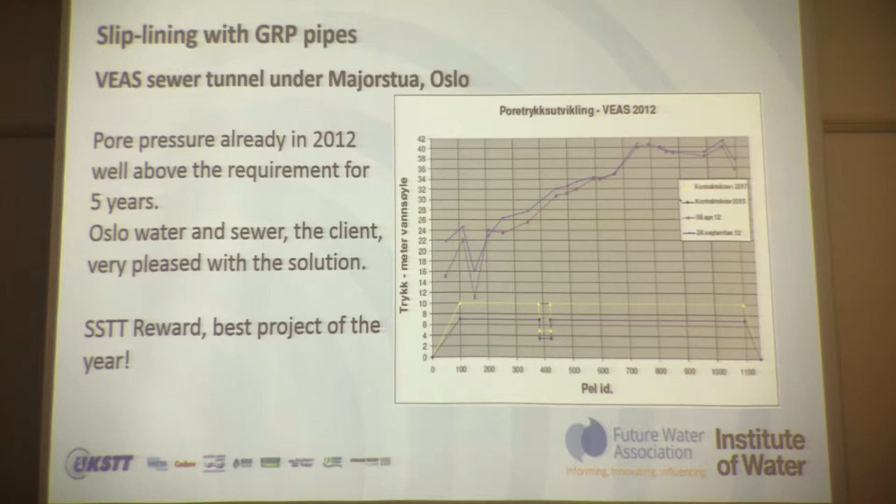So that's it. We also like to thank some of our UK clients for a project that we have been through. So thank you for your attention.

Question: project so far in terms of the length that you've had to do? On slip lining, of course, you mean. The longest section in one section and with one access point, I think, is the big one in Oslo, the 1150 meter. Very impressive, I'm sure everybody agrees. Okay, thank you very much. Thank you.

Thank you very much for that. And again, if you do have questions for Jarle, then I'm sure he'll be really happy to answer them during the breaks. We're now going to ask Robin Bell from Inflowmatix to join us. Robin's had senior roles in a number of large technology-led companies, but now he is the Chief Operating Officer for Inflowmatix.

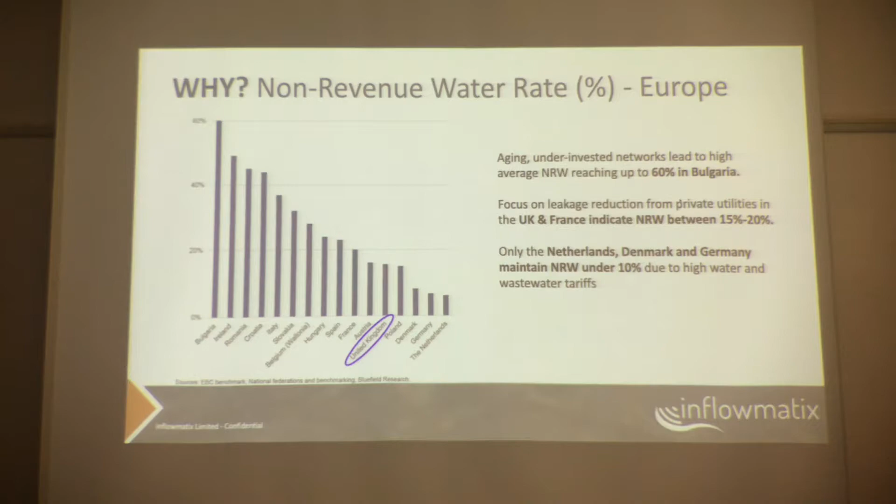And yeah, another one of these charts, kind of the other way around to yours, Joe. What I love on this one is Bulgaria - actually that doesn't work, but Bulgaria's on the left. I've been to Bulgaria a couple of times. Even they talk about, and their regulator talks about, 60% water loss, but we know on the eastern side near the mountains, they have up to 85% water loss. However, as a market we found it not very easy because they have no money either. So maybe at some point they'll figure this out, but it's really quite a challenge. And you can see us there - okay, we're towards the right-hand side, but that clearly still isn't good enough.

And it is actually about oversampling. Nyquist is the theory of oversampling communications. It applies directly to pressure measurement too. We're oversampling to get clean edges on high frequency data. We've calculated, we've worked out that 128 is enough. Some people do go higher - we don't think it makes much difference. I think if you go lower, you're starting to lose stuff.

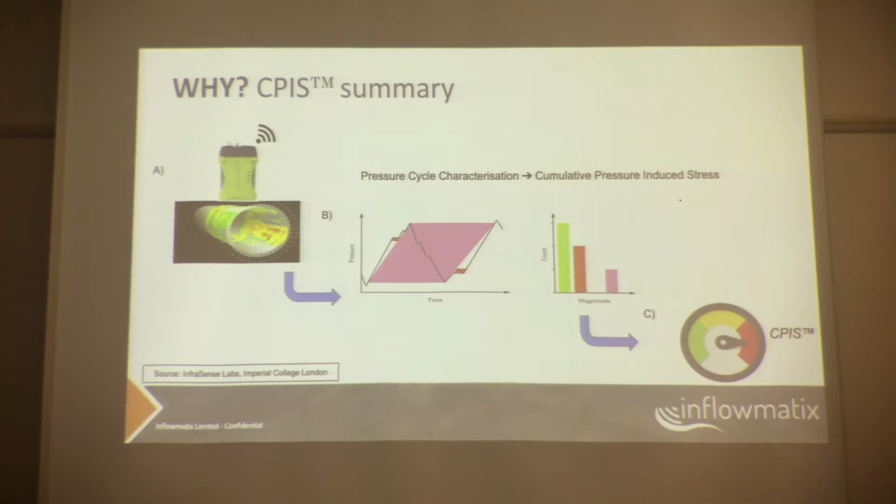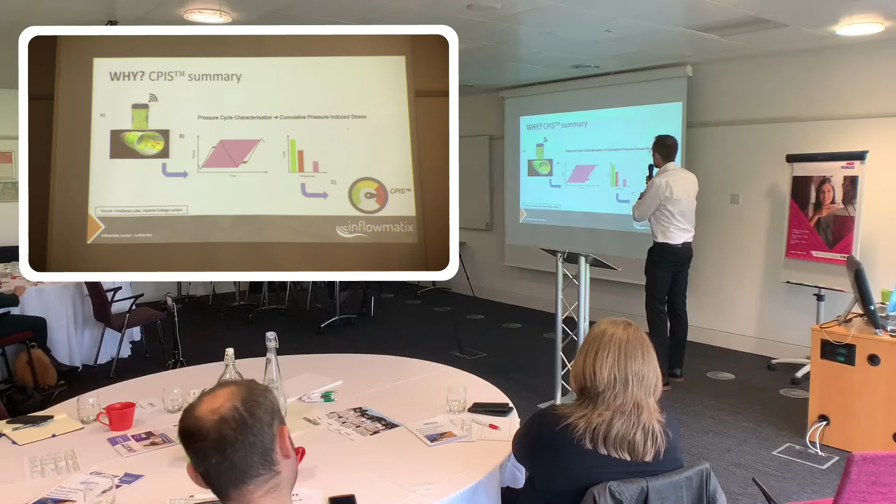So we have a particular metric we call cumulative pressure-induced stress. This came out of Imperial College. It's a very good metric in calculating not just the single effect of transients - I try not to talk about transients because a transient is a single event, this is about dynamic pressure variations in the network. So what we do, in simple terms, on the left-hand side we're collecting the data. We're then using some software tools to summarize that data, to make it achievable in low-cost hardware, and count the variations - even if they're tiny compared to larger variations - and provide a metric. You'll see how we can use that metric as we go forward.

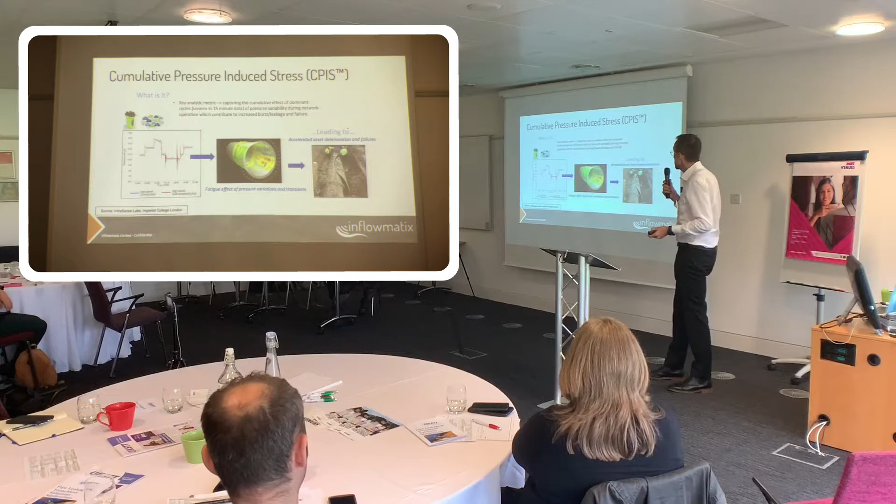And I think the industry is starting to realize that preventing - we've heard prevent mentioned a couple of times - is really important. So understanding this and then applying it is where we need to go.

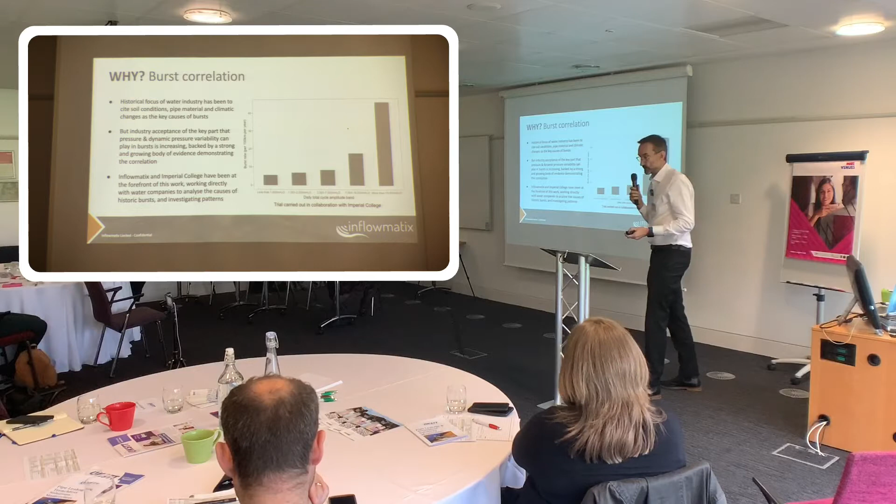So can you put your hand up if you've ever heard a transient? More than I thought, but that's tremendous. So you're going to hear one again. And for those who haven't, hopefully this will be somewhat revealing. Now we're hoping the sound is set right.

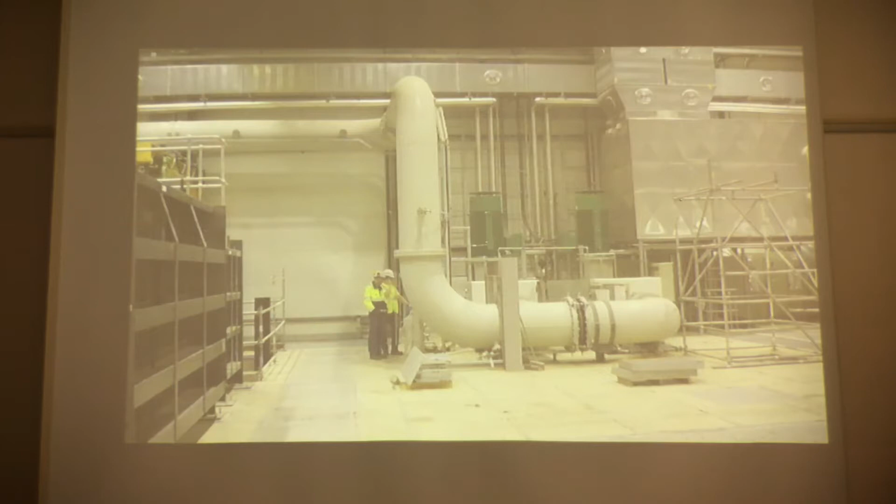This could affect your eardrums. So this is an industrial location - I can't tell you where it is, but there are pump banks here. You'll see the pump switch from one bank to the other, and you'll see what happens. So I'll probably end up playing it a couple of times. So here we go.

So I'll just reverse that and show it again. So you can see the pump go and the significant movement of that pipe.

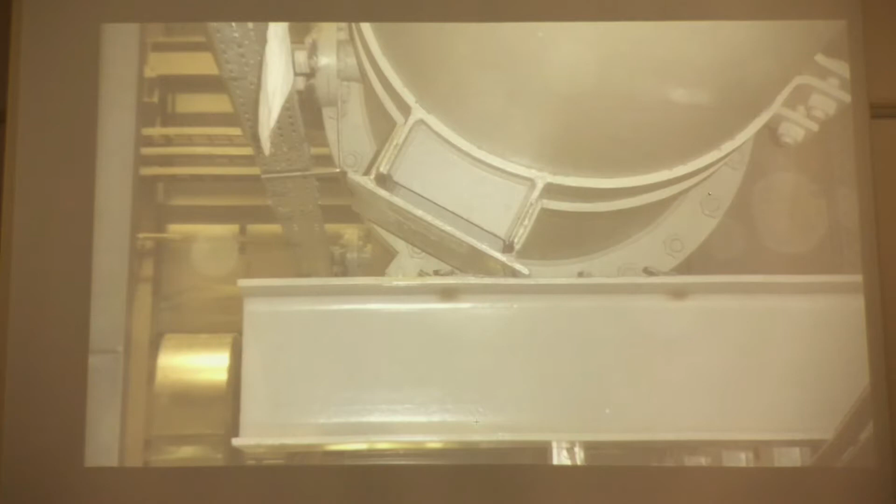And that's literally due to pump variations, and that's actually what it did to the pipe. So if anybody was in any doubt about what high frequency pressure variations, transient kind of effects can do, in this case it's effectively a pump surge effect, then that's a good indication.

So I have a second one. Now this was done at a university installation. It's a transient rig that was created, and what's interesting here is the time it takes for a transient to be created and to dissipate, and the cavitation effects you actually see in the water. So again, I'll kick that off.

Sounds working well. So you can see the cavitation effects there, and that is literally air and water moving through the network, and just wait for those delayed reactions. There might even be one more. No, that was it.

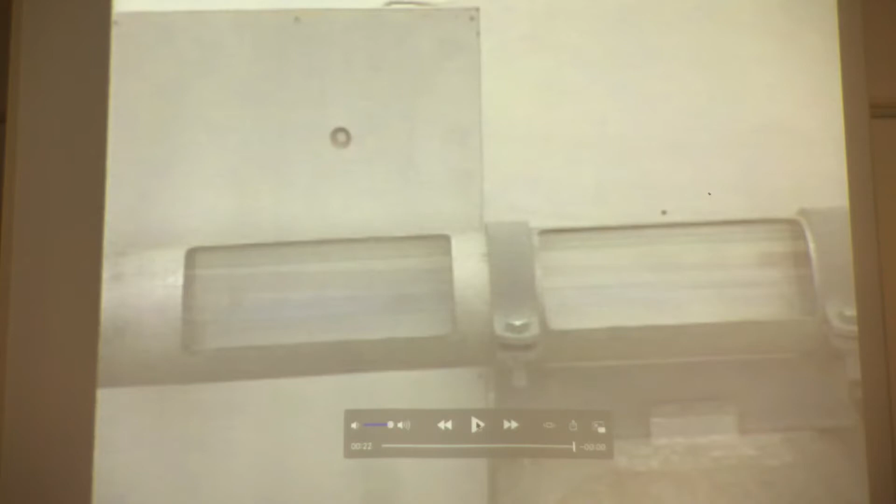So they are huge, these effects. They need to be mitigated. And again, they're really very physical. So I'll continue with the slides.

So how do we address this? What are we doing to deal with these effects? The first thing we're doing is trying to provide actionable intelligence, information to hydraulically calm networks and reduce pipe stress. We sometimes call this our network narrative. The second thing is looking at automatic network control to optimize pressure management and improve efficiency and reduce operating costs. This whole approach is applicable to distribution and transmission networks.

So I'm kind of pleased I'm in this section because it feeds into, I think we'll be talking more about distribution in a minute.

What we do is not only these devices, so we use this device to measure high frequency pressure variations. We didn't want to have to create a device to do this, but we couldn't find anything with the right accuracy in the time and pressure domain, and we needed to make sure we could get that information into the cloud and be able to use it.

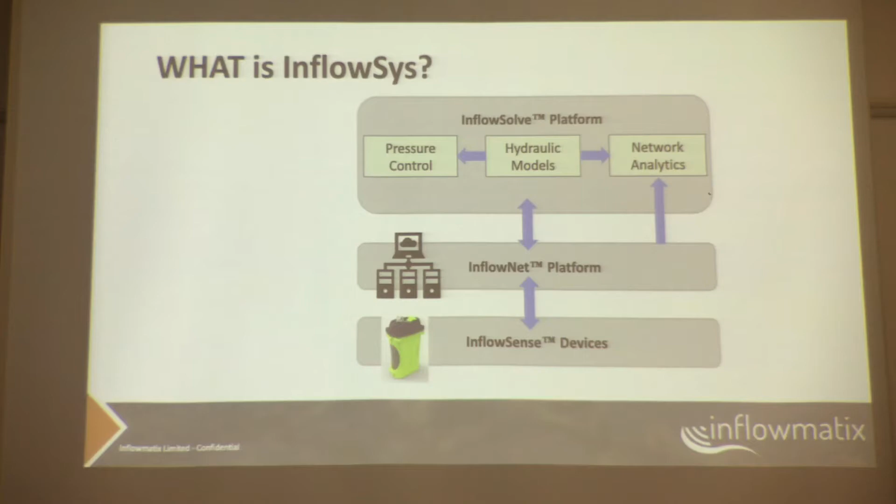That is fed by what we call InflowSolve. It's an analytical platform where the hydraulic modeling solutions are put together. We pride ourselves on working on data, but from a hydraulic perspective. We don't believe you can just look at data, that you need to have that hydraulic understanding. And that's come up in a few of the presentations we've heard already.

We have an InflowNet web application, so you can actually look at the data. But actually, more importantly, our customers, the utilities in the UK and worldwide, really need that integration piece. So we'd rather not do the web platform, but we recognize we have to. We need to feed alerts or alarms, whatever terminology the company uses, into the operating system used by the relevant utility. So that also is important.

Now, I'll give an example. We don't have enough time today to cover a whole bunch of things, so apologies if I skip over things quickly. But as one of our product offerings, we're looking at localizing events, transient type events in the network, and in some measure we can do that for bursts and leaks where there are changes in the network.

So we have two approaches. One is event source localization, so we can get to a certain accuracy. And the second is looking at demand anomalies using the pressure measurement devices that are installed in a DMA.

For example, we usually install something like 5 devices per DMA. Some of us have been at presentations where Anglian Water, who are using our devices, are doing just that. And that, as a result of analysis, on average, gives enough information to actually do something useful with.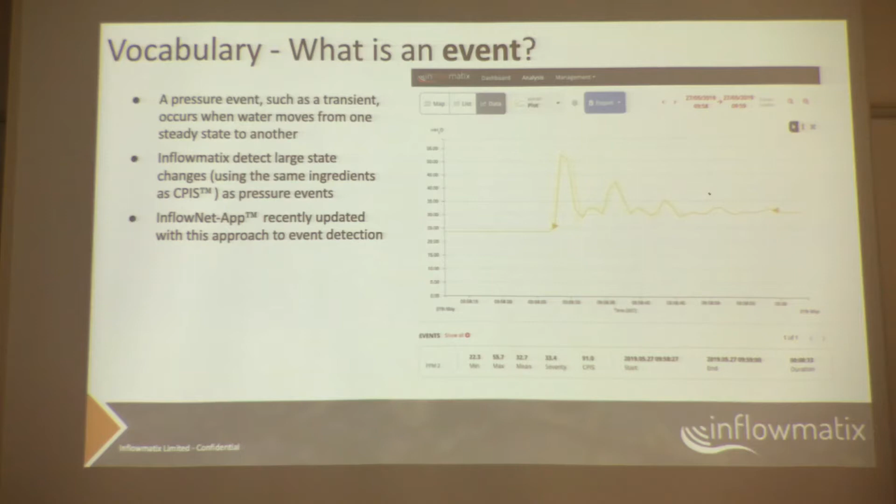So what is an event? This is an example. It's where a transient event is where the water pressure moves from one steady state to another state. So we can detect those large state transients with this cumulative pressure-induced stress metric, but also we can detect those as individual events. And then we can use those in our analytical approaches.

And then the other part of the vocabulary is what is an EN model. So it's an equivalent network model.

You can see there we have a number of devices deployed. If we know the elevation, we can work out the pressure head. If we know the flow into the network, we can then do some very interesting things to calibrate the model and identify where there is some anomalous behavior.

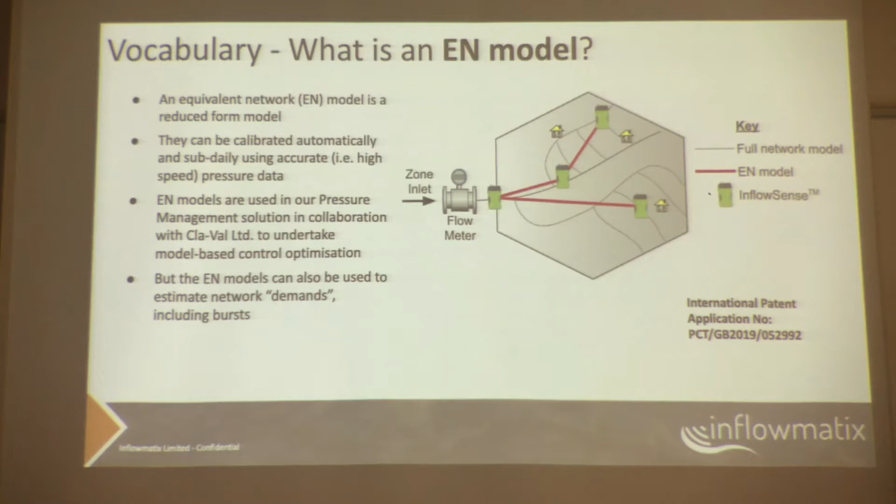So the transients or the pressure measurements we make in this product are accurate to within 10 milliseconds. That's taken a lot of effort to achieve that, and we also have IP around that too.

Now, to some customers, that's not compelling enough. It's good, but what we're now doing is we're overlaying that within the GIS network, and that allows us to, I wouldn't say pinpoint, I would say localize, but get closer to the source of that event.

It could be a burst, but not every burst creates a signature that you can pick up in the pressure domain as a transient effect. But it allows us to find points of interest, if you like.

One thing I should say is we don't see this as a replacement for noise correlation. We see this as augmenting noise correlation.

We're doing some great work with Anglian Water at the moment where they have a significant number of points of interest from noise correlation, but actually sometimes you need a bit of a steer as to where to focus efforts. So again, we're working with them to bring the different technologies together.

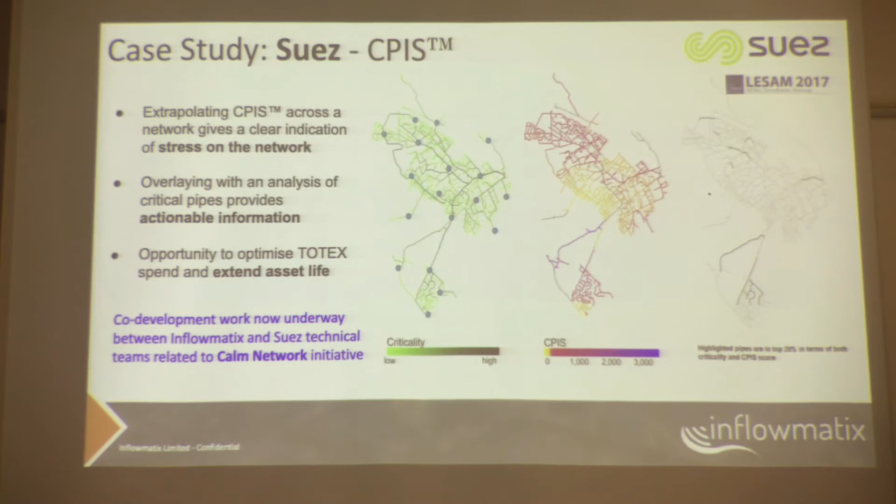Now, this was one of the first case studies we did with Suez, and it started the relationship back in 2017. I was pleased to spend a lot of time on this, actually, and this was to the west of Paris. I helped do 54 deployments in that area. And what we did, we were able to measure and extrapolate the cumulative pressure-induced stress across the network.

We did an assessment in conjunction with Suez on the criticality of the various pipes within that network. And we were able to then identify where there were pipes which were the most vulnerable and where to target investment. Now, the ideal scenario for this is you overlay on top of that as well pipe condition.

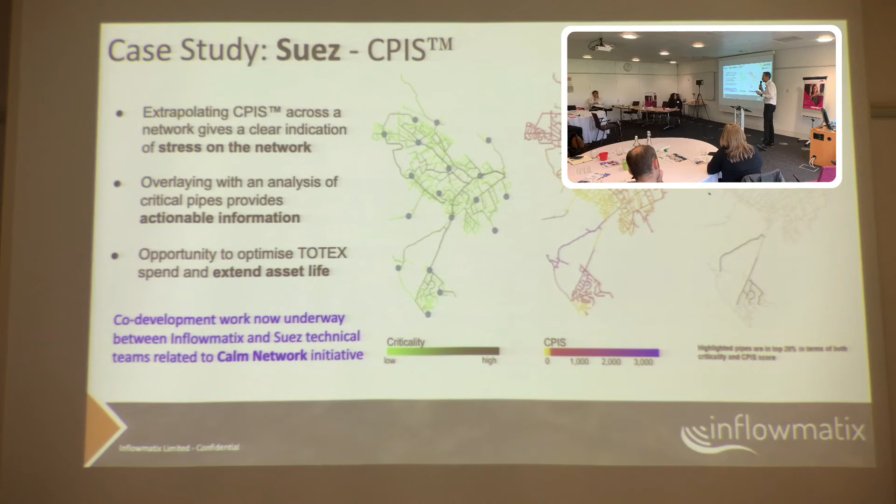We're now working with Suez on their Calm Network initiative. For those of you who've kept an eye on LinkedIn, they're looking to achieve 30 million savings across their 300,000 kilometers of network in France by 2023. So we're a part of that, and we're part of the Aqua Advanced, or doing the integration with our Aqua Advanced solution.

So flipping this from detecting things that have happened to preventing things. So we've introduced our pressure management solution, and this is a case study working with Wessex Water, where you can see on the left-hand side of that plot.

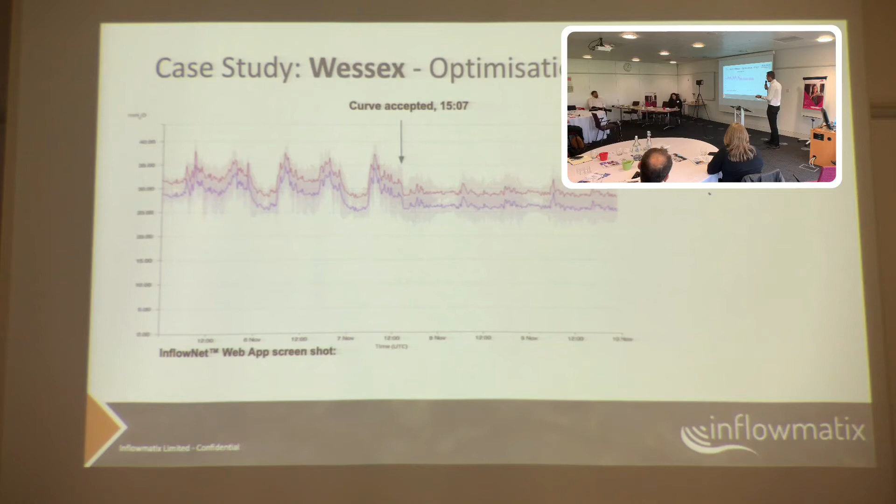Again, we're plotting meters of pressure, meters of water against time, and a new curve was implemented based on, there were 3 of these devices within a DMA providing information to our algorithms to create a curve.

I worked at I2O Water. I was part of what we did there on pressure management, but we knew the limitations when we created Inflowmatix of just having one critical point measurement.

The danger is you push the variations to other points in the network. So having multiple inputs and creating an algorithm that can truly calm the network is really important.

So you can see this calmer operation from that point. And I think what's interesting here is we have a hypothesis that, yes, reducing average pressure has helped reduce the level of bursts, but actually maybe flip that around.

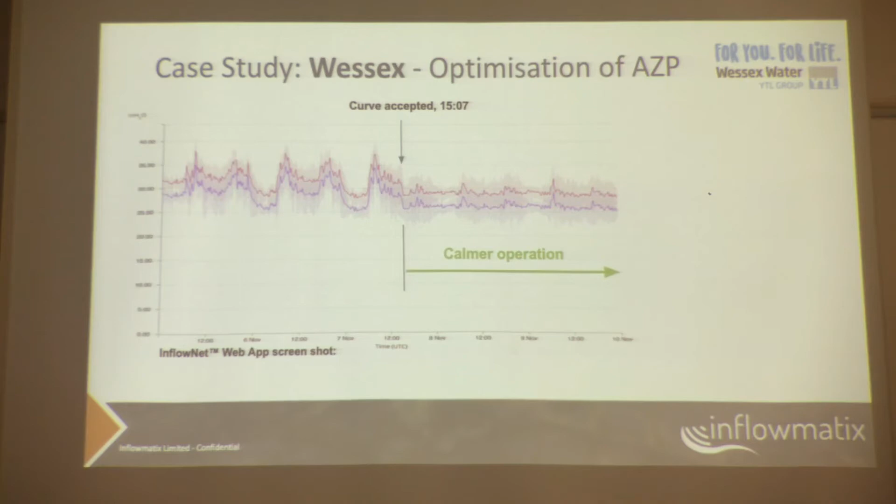Maybe the problems were caused, we know they were caused by the peakiness, the dynamic variations. If you can reduce those dynamic variations, maybe you can push the average pressure back up again. So it gives a bit more of a degree of freedom, because there comes a point where you can't just keep pushing down and down and down. So calming the network is clearly the focus here.

Coming back to Severn Trent again, we've had a long relationship with them. We worked collaboratively to estimate a potential 15 to 20% reduction in burst rate as a consequence of calming the network. Bob, you may have seen the white paper that was circulated, and I got permission to share these results, where there are some big numbers - millions of pounds in avoided repair costs, ODI benefits, and so on. It'll be interesting to overlay this on the final determinations to see how that can improve the savings. But again, same curve showing those correlations.

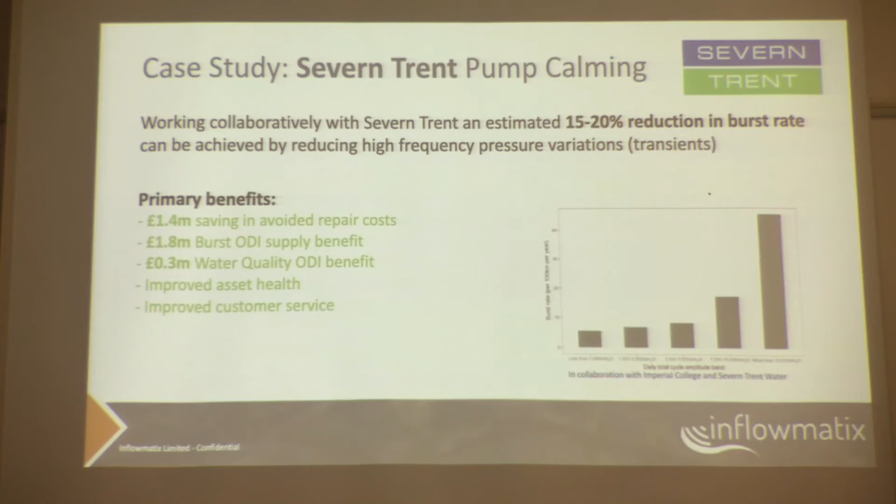There's no doubt calming the network does make a big difference. This is a great example of where we worked very closely with the teams to implement improvements in the operation of variable speed drives. I think we've all heard the fallacy that you just put a VSD in and it solves all your problems. It really doesn't - it needs to be set up correctly.

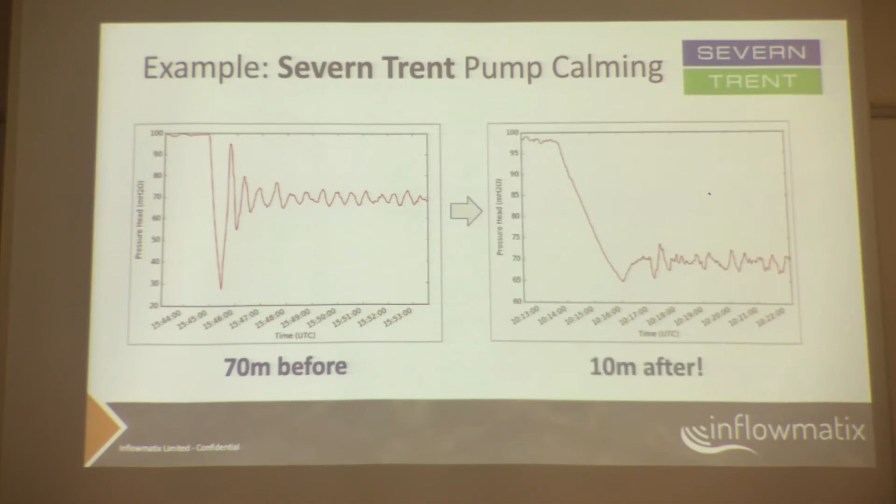So this had a VSD, I believe, and in this particular case there was 70 meters of variation, and then with a lot of detail work - it's not trivial to do this - it was reduced to 10 meters.

A very interesting study we did in one particular area involved monitoring many kilometers of the network to see the effect of these dynamic pressure variations traveling through it. Just like the demonstration, they literally went many kilometers back and forth, and we could detect the dissipation as it went through the network. We also looked at PRVs in a gravity-fed network very close by, and it was quite clear that the maintenance of assets under these 70 meter conditions was significantly increased over the calmer gravity-fed system. So it's quite clear it's not just causing bursts - it is damaging assets.

So coming back to the health asset improvements that Ian talked about, it has a part in that too. So what else are we doing? Very briefly, the last couple of slides.

We have an engagement with Black & Veatch, and we've come up with a DMA health index. We're looking to understand, and help companies - this is a UK initiative, but to help the UK industry - understand the health of the DMAs. It's looking from a slightly different perspective in terms of calmness and how the DMA is operating. We have 12 measures. If you work from the bottom, there are supporting measures in terms of network models and the accuracy of those models, working up to leading measures - cumulative pressure-induced stress comes back in, as you might imagine, understanding pressure target exceedance, and so on.

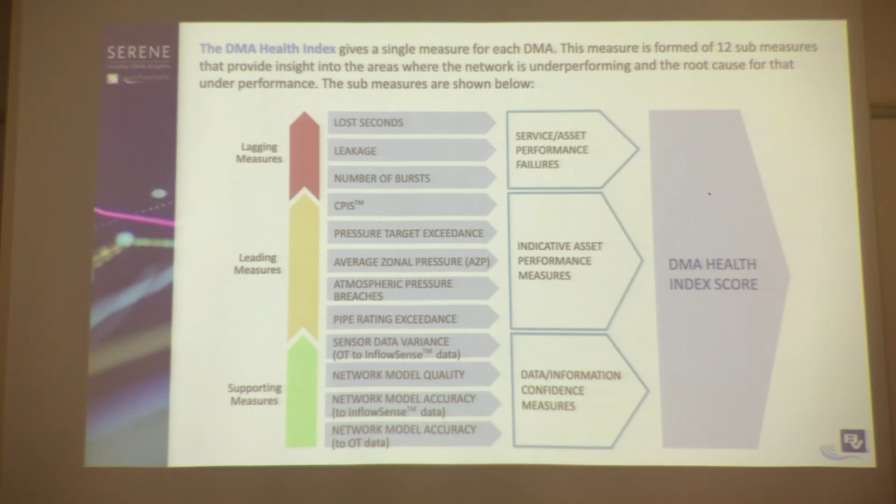And then moving up into the lagging measures such as lost seconds, leakage, and number of bursts. The interesting thing for us is that what we can measure with this device, and contribute into this health index, covers 9 of those features. So working closely with Black & Veatch, we're now engaging with various utilities to see how this can benefit and how this can be integrated with other systems.